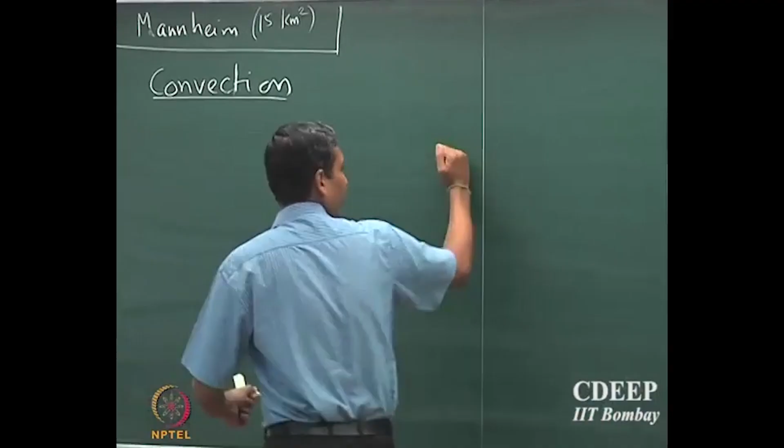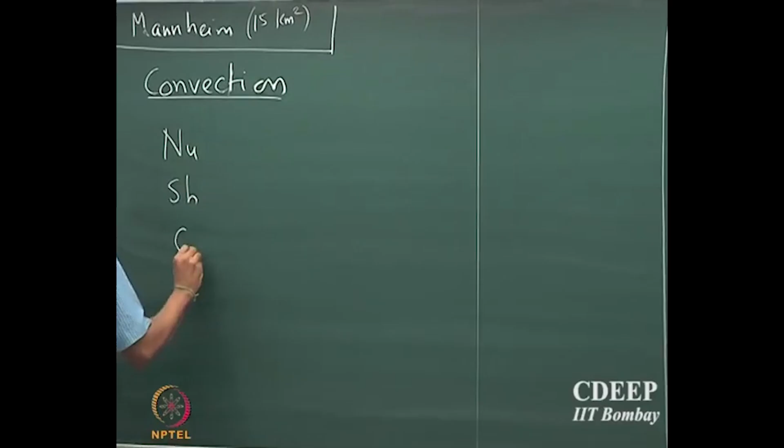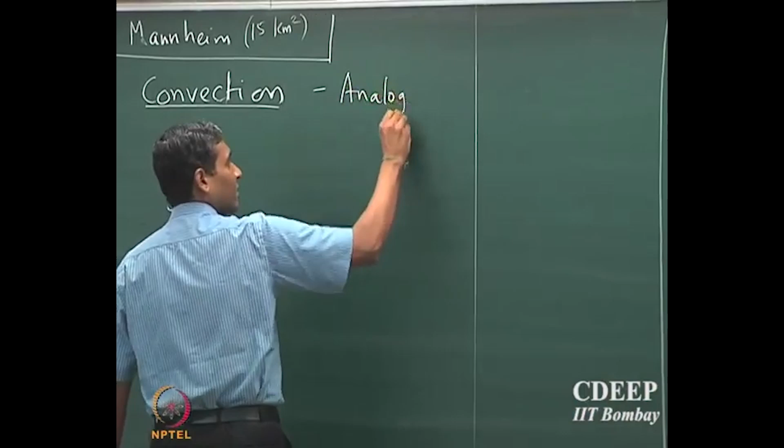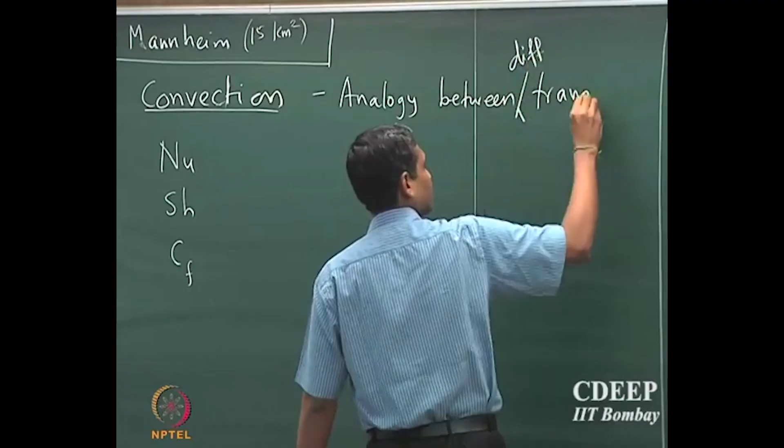Okay, so we've been discussing convection, so let's catch up a little bit and then proceed further. We stopped by observing some of these dimensionless quantities. We've been discussing the analogy between different transport processes. So we said that we define the Nusselt number.

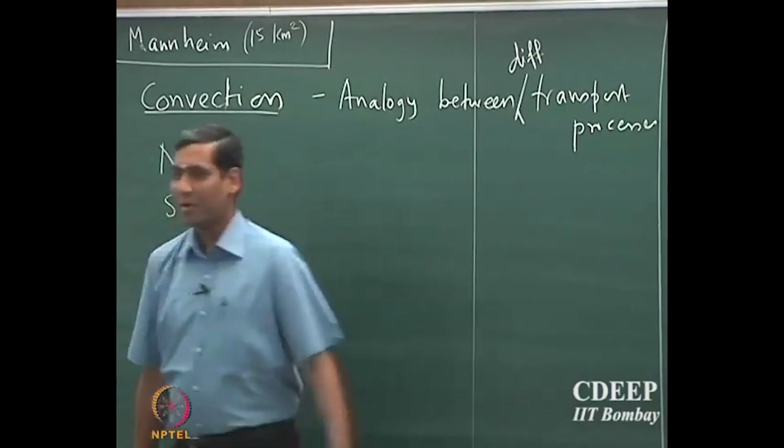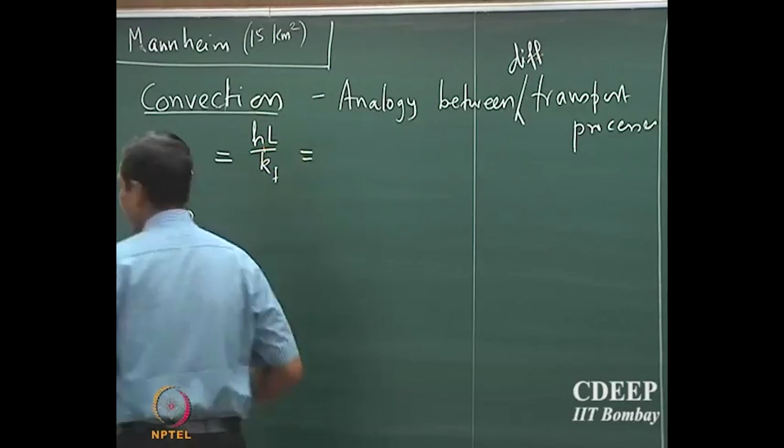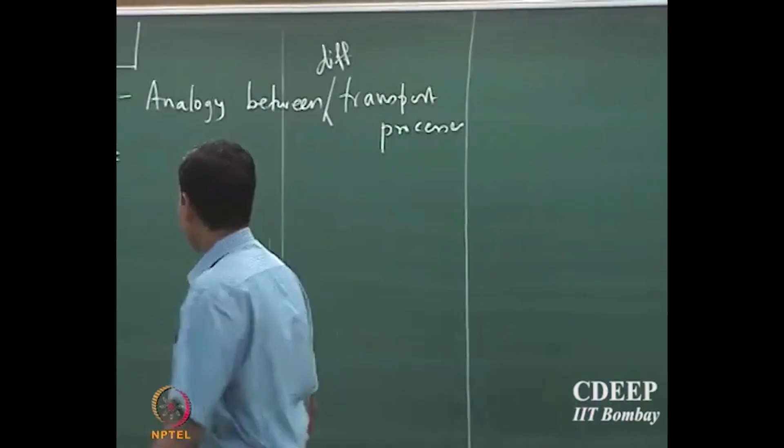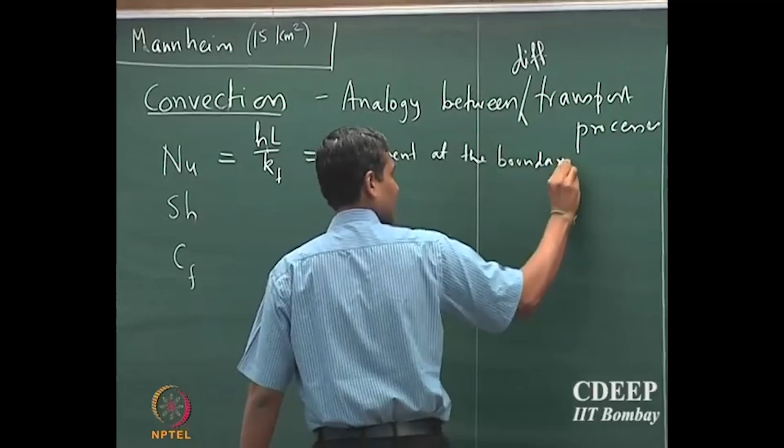Does anyone remember? hL by k. No, it's not minus, it's a positive quantity. What is it? It's the gradient at the boundary. I should rather say interface. It reflects the gradient at the interface.

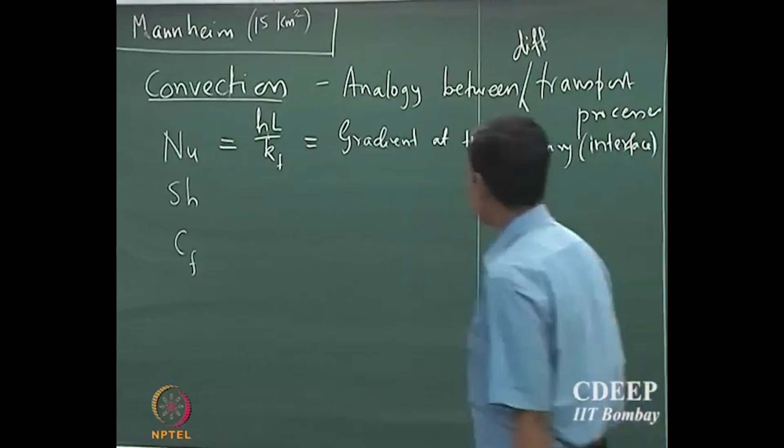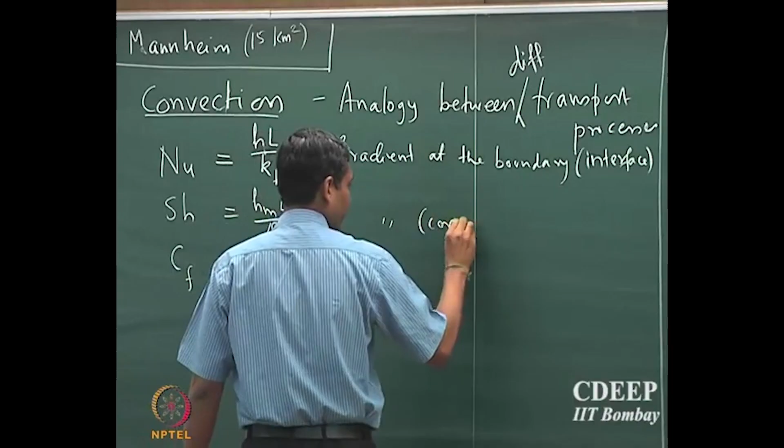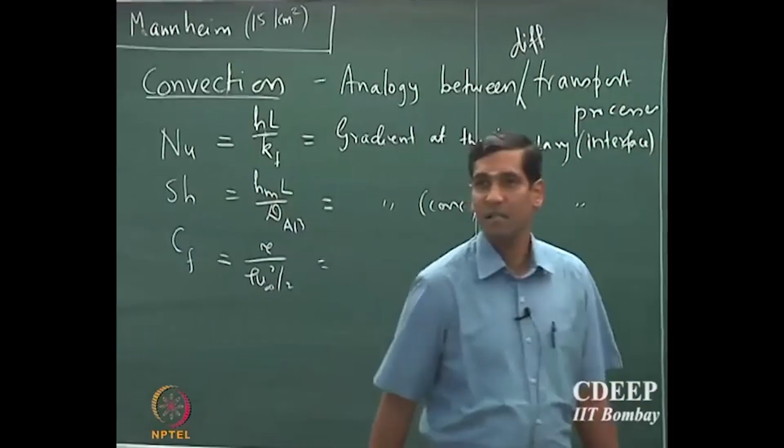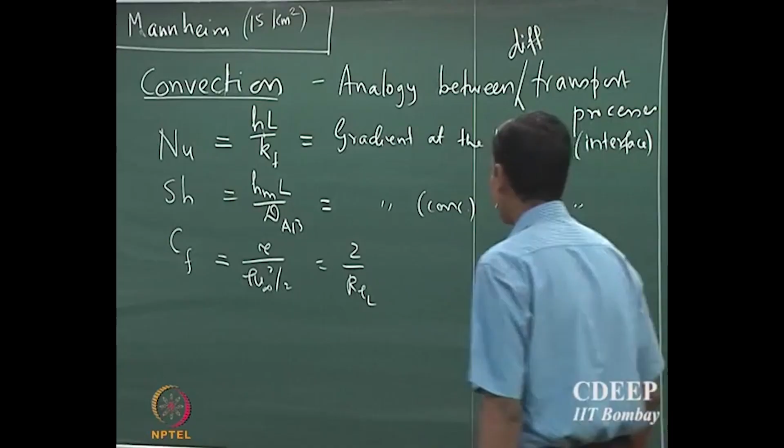Okay, and similarly we could write that, and that's the concentration gradient at the interface. What about Cf? It's tau by rho u square by 2, and that will be 2 by Reynolds number multiplied by the velocity gradient at the interface. Okay.

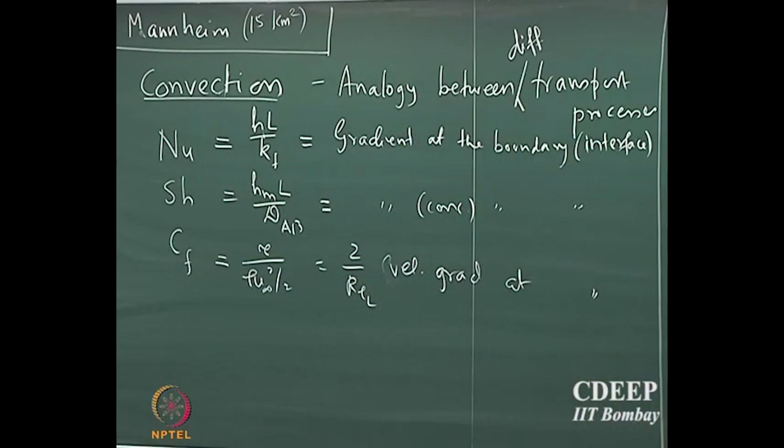But we also defined the Nusselt number as a ratio of the conduction resistance in the fluid divided by the resistance to convection, or rather across the interface, because you are really looking at transport across the interface. And similarly, one could have a definition for the Sherwood number. We will not get into that, it is anyway similar.

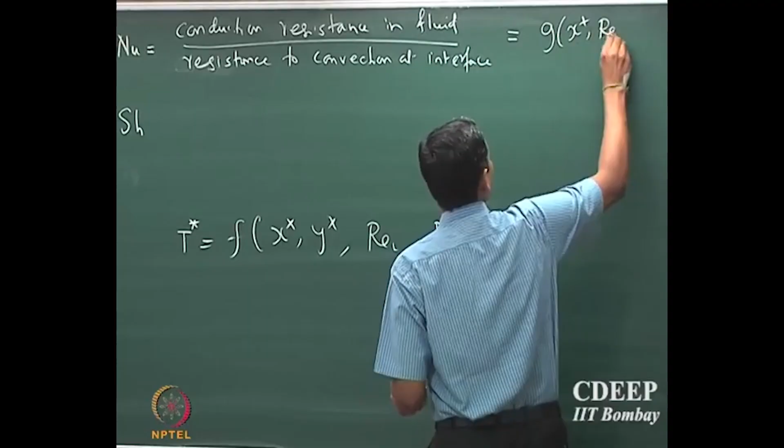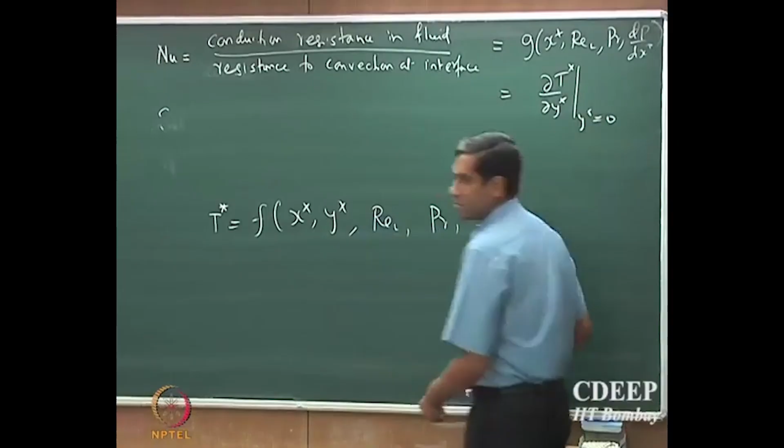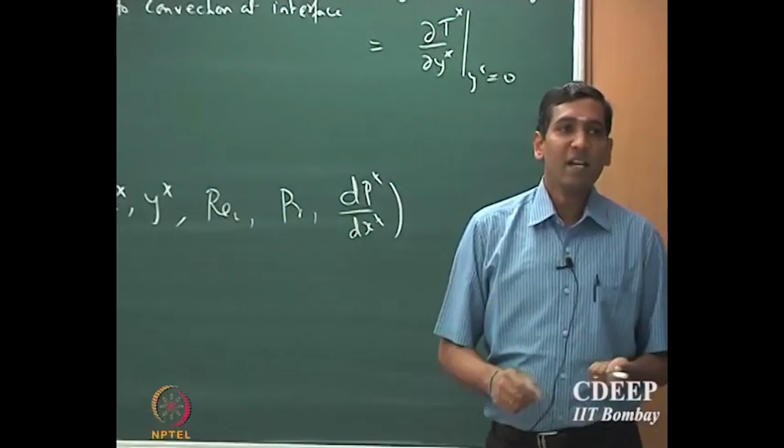Now, we also said, what is the functional form of the Nusselt number? Remember we said that the dimensionless temperature T star is a function of x star, the position inside the boundary layer, Reynolds number, Prandtl number, and if you know the pressure gradient, it is typically a constant. So the Nusselt number will be a function of x star, Reynolds number, Prandtl number, and dP star by dx star. Because it is evaluated at the boundary, you take the first derivative, dT star by dy star at y star equal to 0. So the Nusselt number is not a function of y position anymore, it is only a function of x position, because you are interested in the gradient at the interface, which is y star equal to 0.

Okay, so what we are going to see today is, so far we have not solved any equations. The question is, can we get any further insights without solving the equations? We have to solve them eventually, but let us first try to extract as much information as possible before solving the governing equations.

Okay. So the first observation is that the Prandtl number is a ratio of nu over alpha, which is the momentum diffusivity divided by thermal diffusivity. Now, note that all of these are happening in the boundary layer. So you are looking at characterizing the process in the boundary layer.

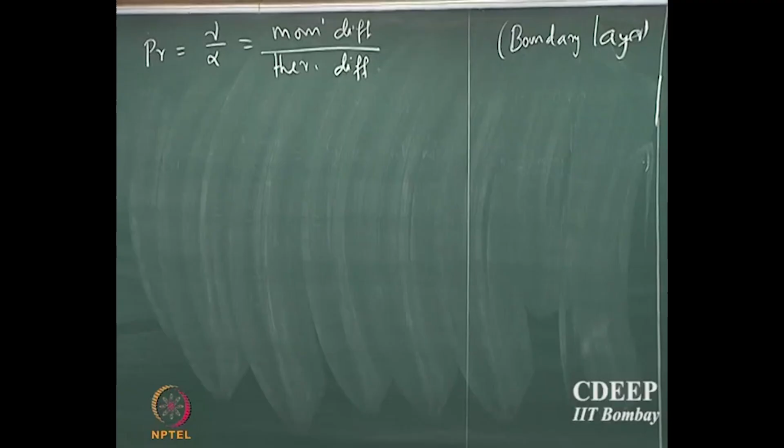So the momentum diffusion and the thermal diffusion have to somehow be related to the delta and delta temperature. What is delta? Delta is the boundary layer thickness. So the momentum diffusion is occurring in the boundary layer, and it has to be a function of the boundary layer thickness, and the thermal diffusivity has to be a function of the thermal boundary layer thickness, because that is the domain in which these two processes are occurring. So, therefore, this is the general functional form. Okay.

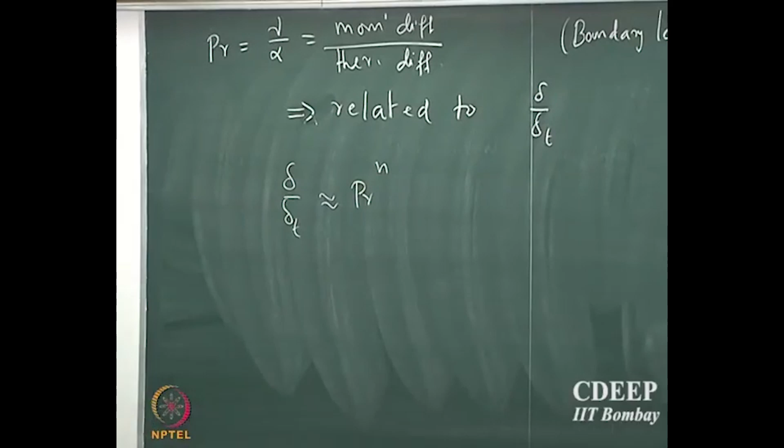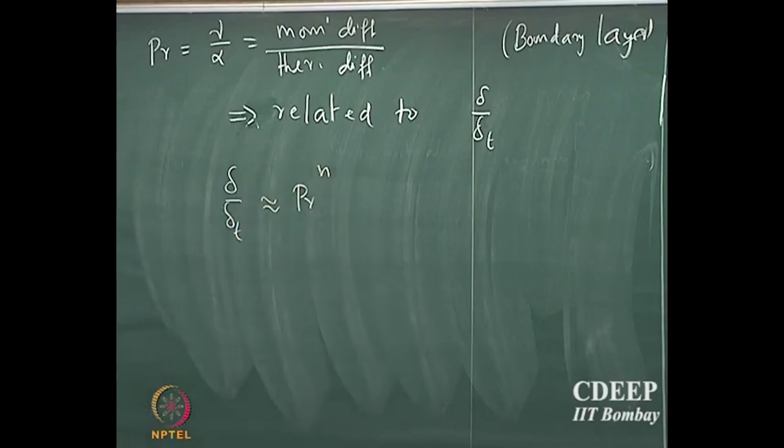We do not know what that n is till now, we are going to figure that out while we discuss different aspects of convection. So, it is safe to assume that the ratio of the momentum boundary layer to the thermal boundary layer thickness scales as Prandtl number to the power of n. Okay, we still do not know what that n is. In fact, some of you who have already done this laminar and turbulent flow experiment in the lab, you must have seen some exponent like this, and so we are going to see what that exponent is. Similarly, one could express delta by delta C as Schmidt number to the power of n.

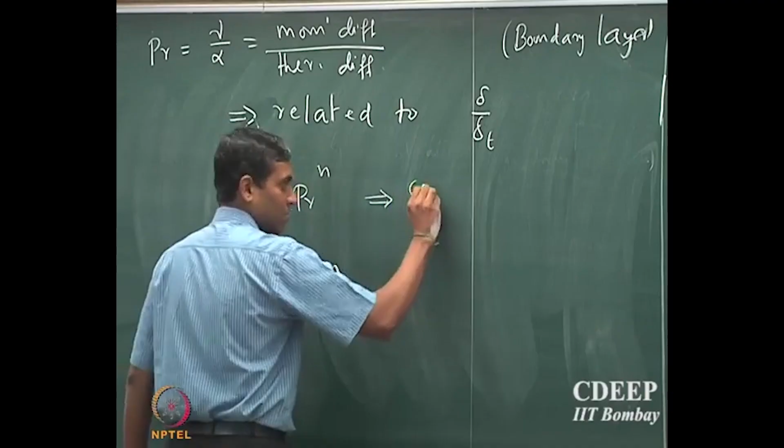So, this also provides a method to compare the boundary layer thicknesses, and same here. So, immediately I could take a ratio of these two. I can say Prandtl number to the power of n, Schmidt number to the power of n. So, that goes as delta C by delta T.

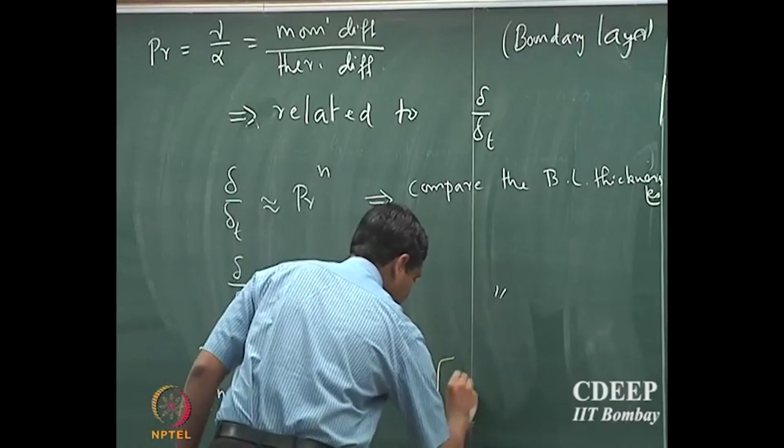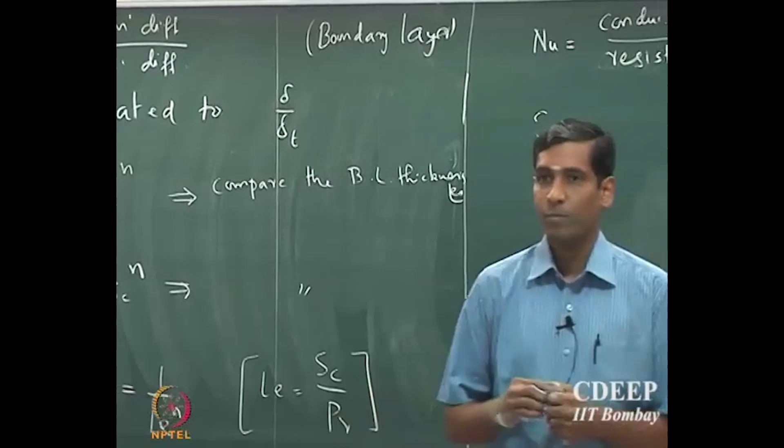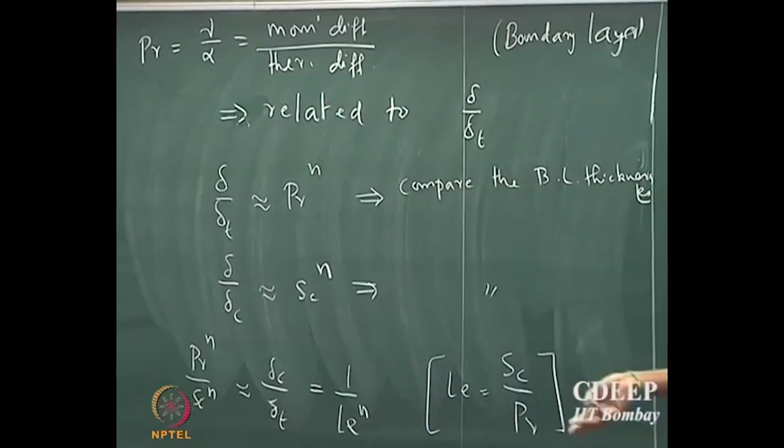Let me make sure I get the numbers right. That is called Lewis number. So, Lewis number is defined as Schmidt divided by Prandtl number. So, if we define a new number called Lewis number, what would be the definition for Lewis number? Remember Prandtl is momentum by thermal diffusivity, Schmidt number is momentum by mass diffusivity. So, Lewis number will be thermal by mass diffusivity, okay.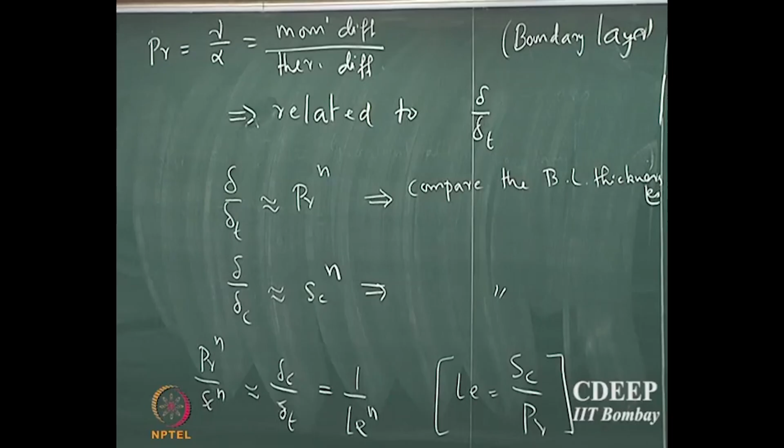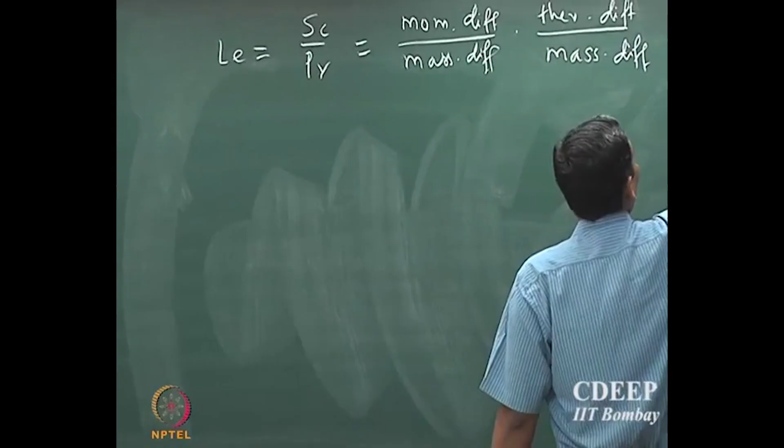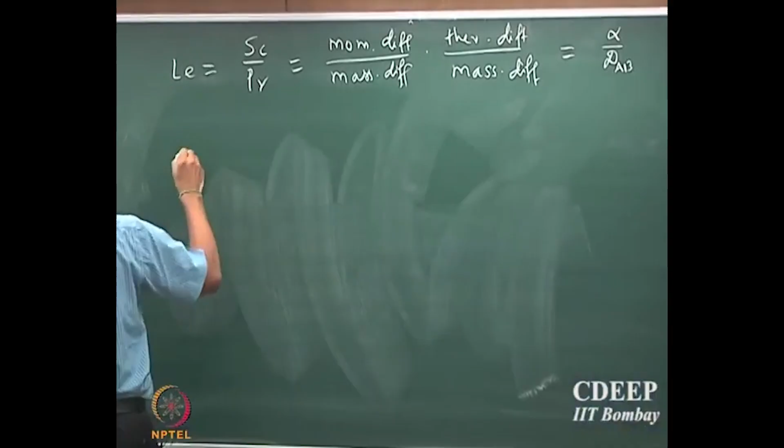So, Lewis number is given by momentum diffusivity divided by mass diffusivity multiplied by thermal diffusivity divided by momentum diffusivity, and so that will be alpha by DAB, where alpha is the thermal diffusivity of the fluid that you are considering, and DAB is the equimolar mass diffusivity of the species that is diffusing in that particular stream. So, really what we have found is that Lewis number, Prandtl number, Schmidt number and Reynolds number, based on the length of the plate, because we have looked at flat plate, you could always consider other geometries. These 4 numbers essentially characterize the diffusive properties of all 3 different transport mechanisms.

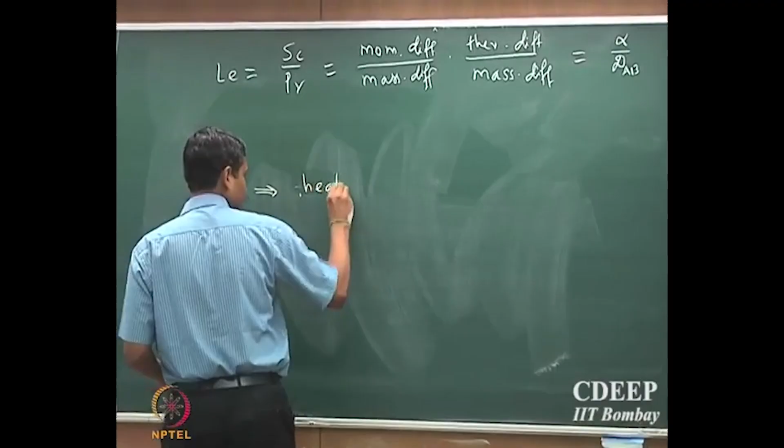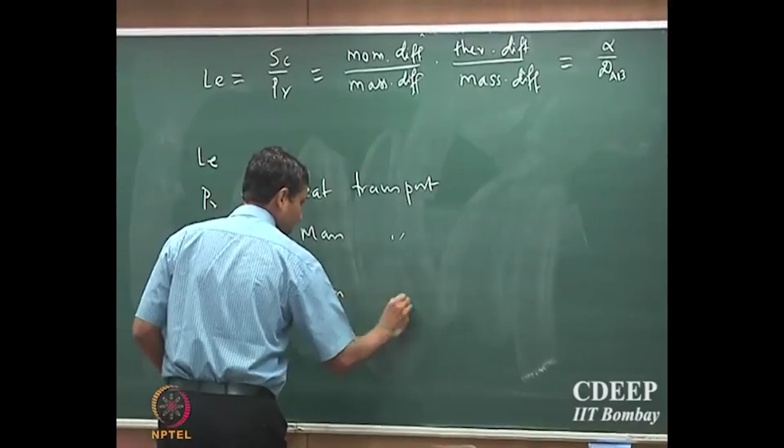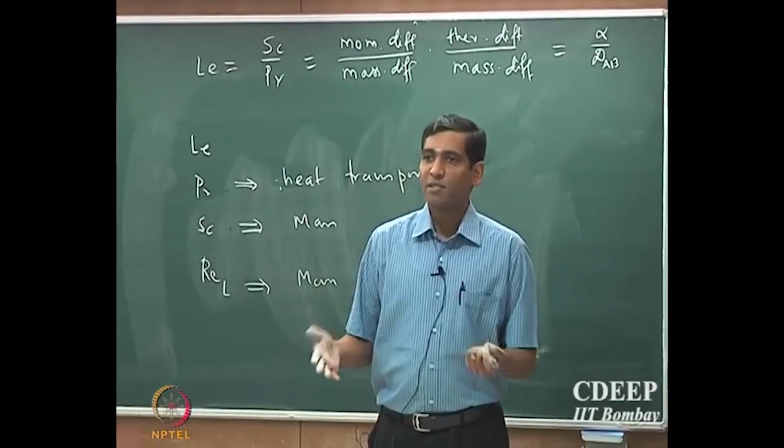So, you get a way by which you can compare all of these, which means that if you know one of them, if you know Reynolds number, there has to be some relationship between the heat transport and the mass transport processes. Each of these numbers, Prandtl, Schmidt and Reynolds number, independently characterize each of the transport processes. So, this characterizes the thermal transport or the heat transport processes. This characterizes the mass transport process, and this characterizes the momentum transport process. Now, you may also recall that the governing equations that we wrote for these 3 transport processes, if we introduce the boundary layer approximation, they all look similar, right. They all have same terms, they have a convection term, they have a diffusion term, plus the momentum boundary layer equation has a constant, which is the pressure gradient.

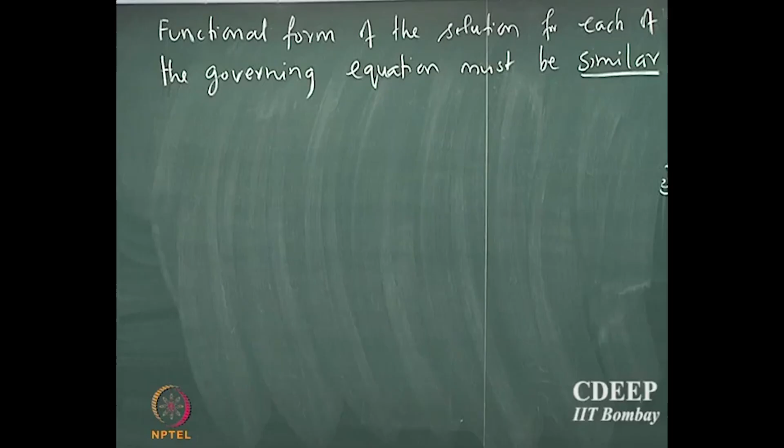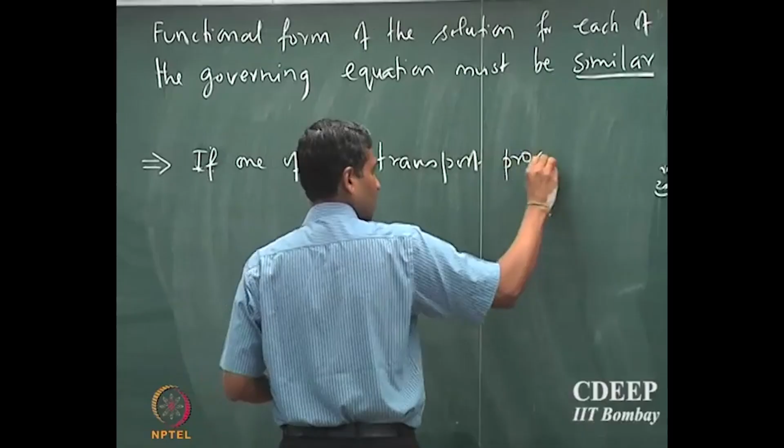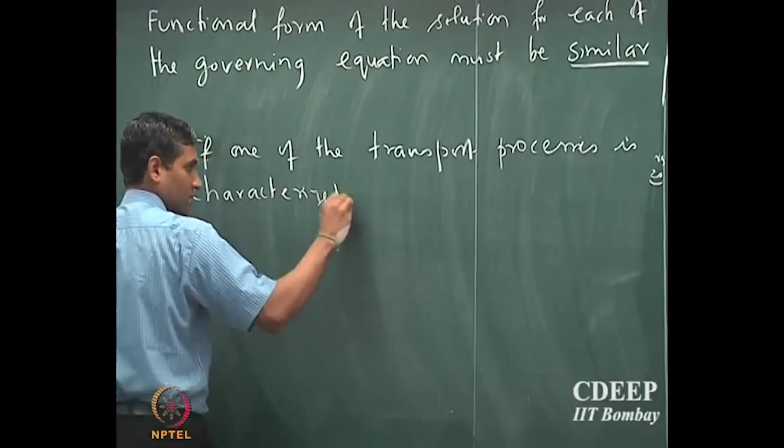So, the functional form of the solution must be similar. Okay. So, it is very important to understand this, it is not same, it is similar, okay, because the momentum boundary layer equation does not depend upon the concentration and temperature, while the concentration and thermal boundary layer equations depend upon the velocity, although their functional form is same. So, therefore, the functional form of the solution that you get has to be similar to each other, which also implies that if one of the processes is characterized, then the other 2 must be similar,

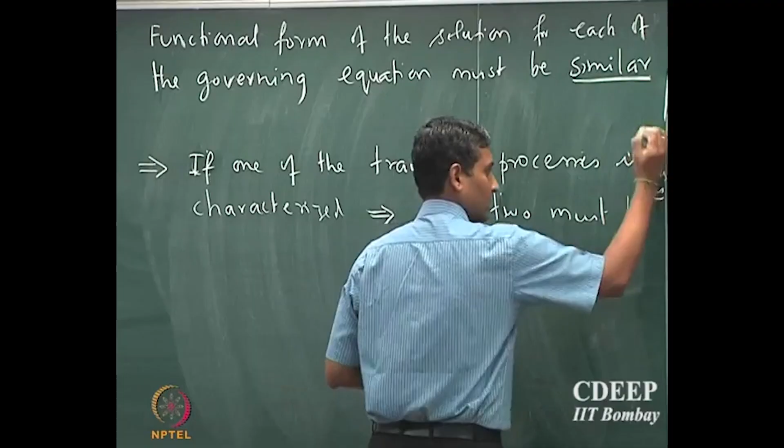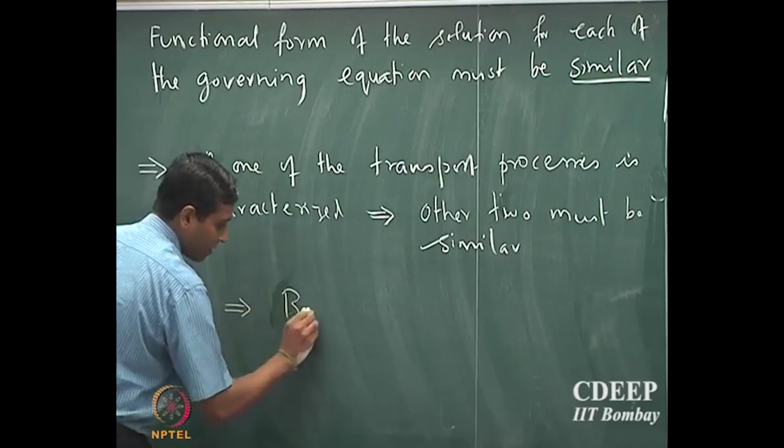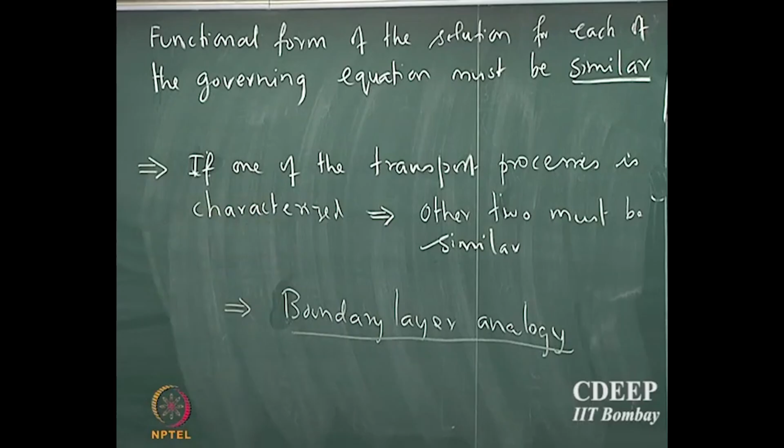okay. So, that also means that because the functional form is same, if one of the transport processes is characterized, if I know how to solve one of them and I found the functional form and I found these dimensionless numbers, then I'm done. I should be able to find the solutions for the other two. Okay. So it is this property which leads to the concept of the boundary layer analogy. So we are going to capitalize on this observation that the functional form is similar, and we are going to identify how to relate these three transport processes, and therefore by characterizing one of them we should be able to characterize the remaining.

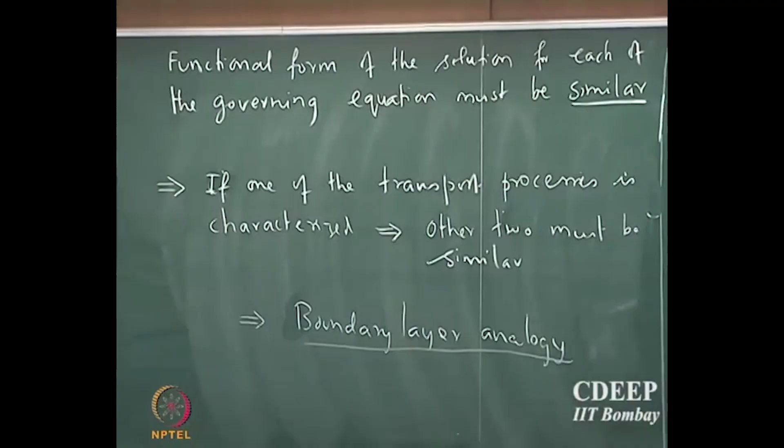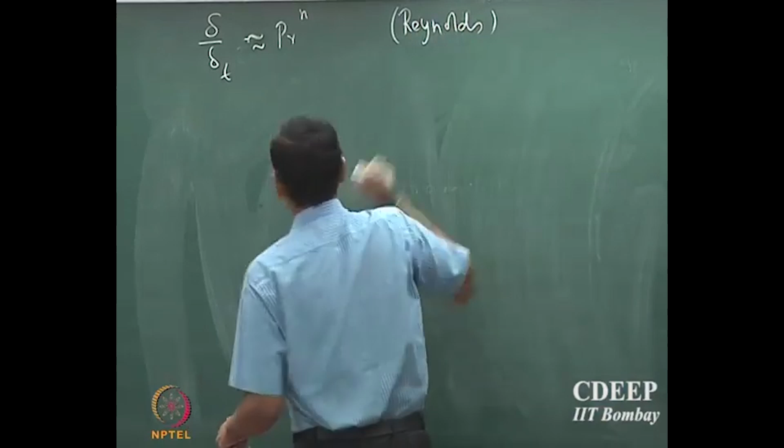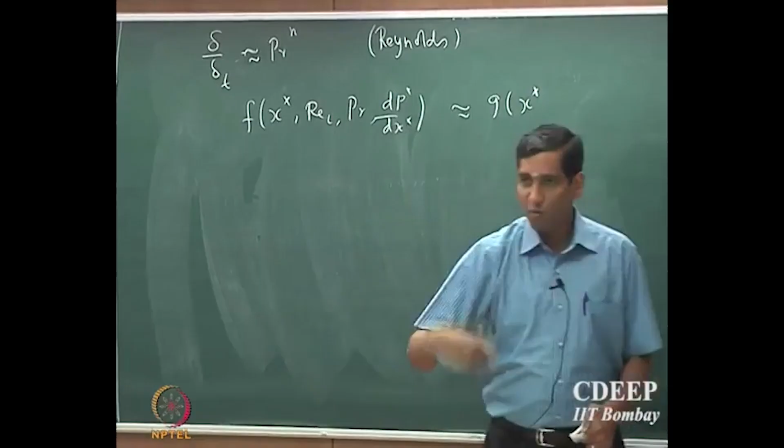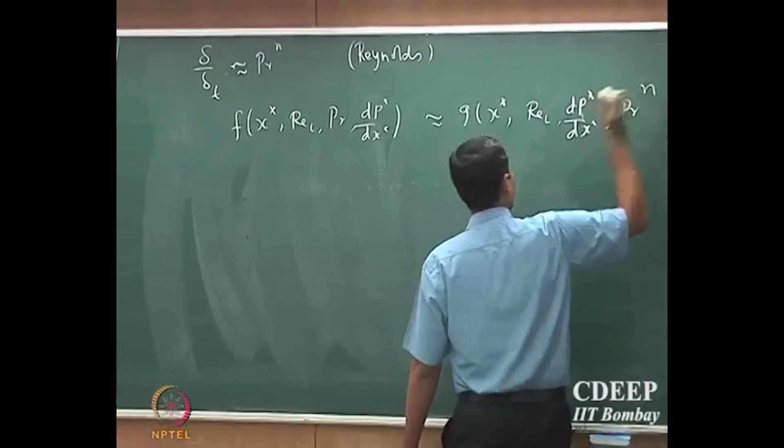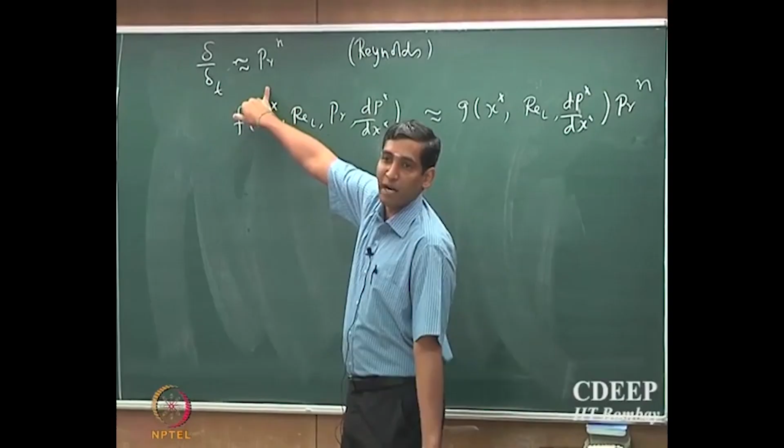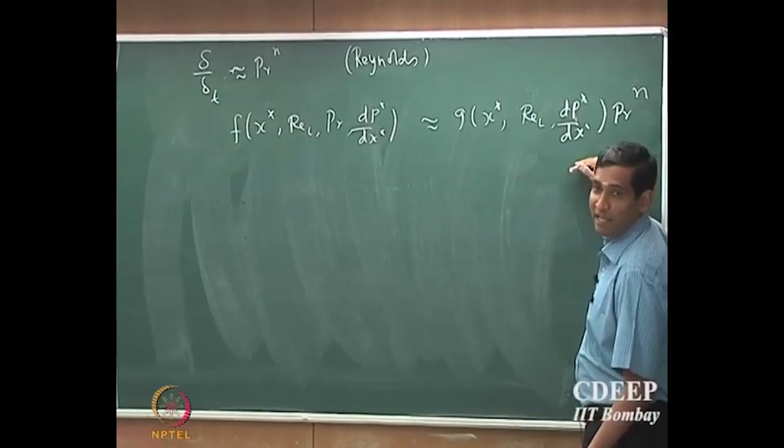Prandtl number to the power of n. So it scales as some function multiplied by Prandtl number to the power of n, and in fact that observation is because of the positing that the ratio of boundary layer thicknesses scales as the Prandtl number to the power of n. This may appear very heuristic right now, but you will see in the subsequent lectures that in almost all the geometries and all the problems you consider, this is the kind of scaling you would usually get. So for now we will assume that this is the scaling that you will get.

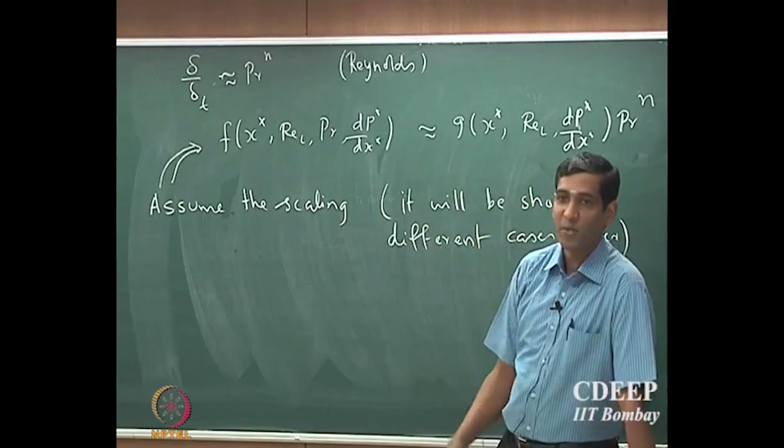Assume this scaling. In fact, for different cases later. By the way, this has been experimentally shown very well. There are some nice experiments that have been performed where you can see this kind of scaling has been observed experimentally for different kinds of problems.

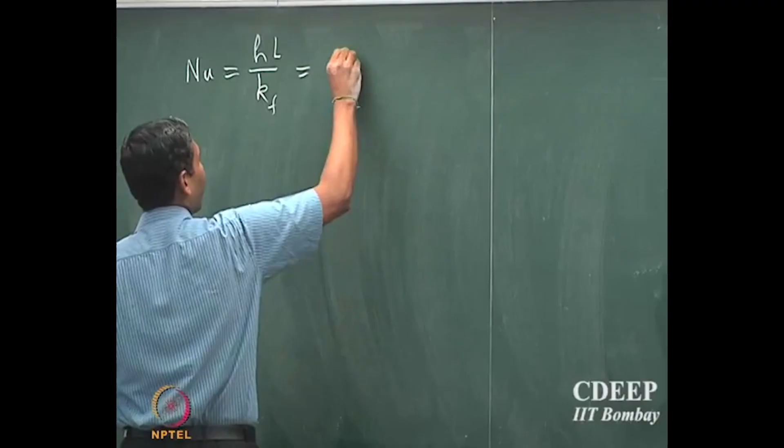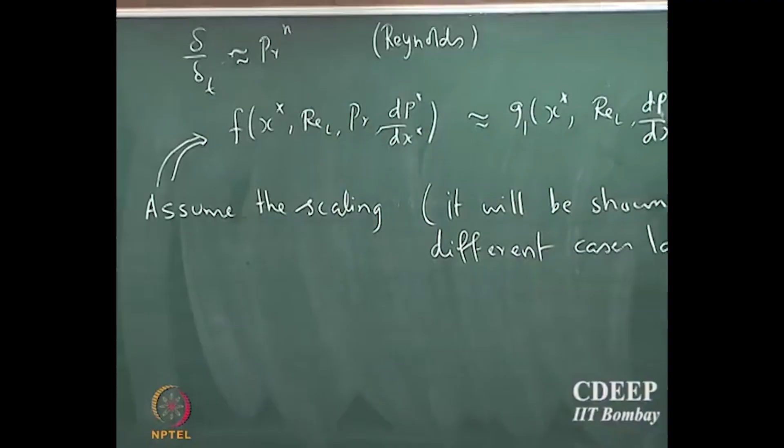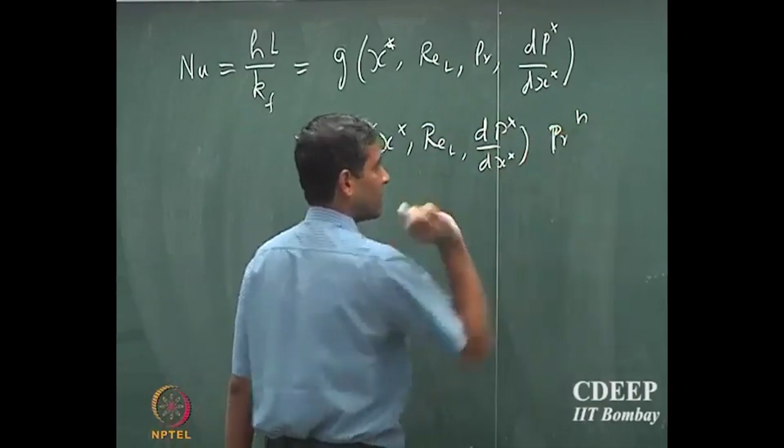So similarly, you could assume, therefore we said that the Nusselt number, which is hL by kf, is given by some functional form. Let me use a different nomenclature and call it G, a function of x star, REL and Prandtl number. It turns out that it scales as dp star by dx star into Prandtl number to the power of n. That is because of the observation that the Prandtl number to the power of n scales out as a separate entity in the functional form. We should be able to write the Nusselt number simply as some function G1 of x star, the x position, the Reynolds number and some pressure gradient, multiplied by Prandtl number to the power of n.

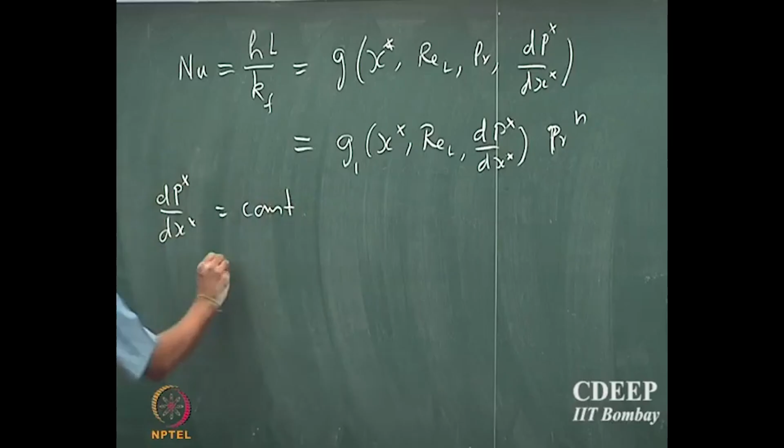Supposing I assume that dp star by dx star is constant, which is a fair thing to say, the Nusselt number can simply be written as G1 of x star, REL, into Prandtl number to the power of n. Similarly, the Sherwood number will have the same functional form of x star multiplied by Schmidt number to the power of n. Any questions? Because the heat transport and mass transport in the boundary layer are related to each other.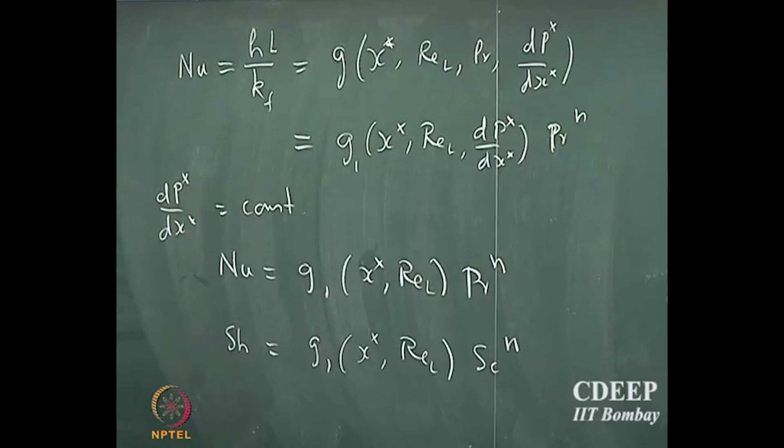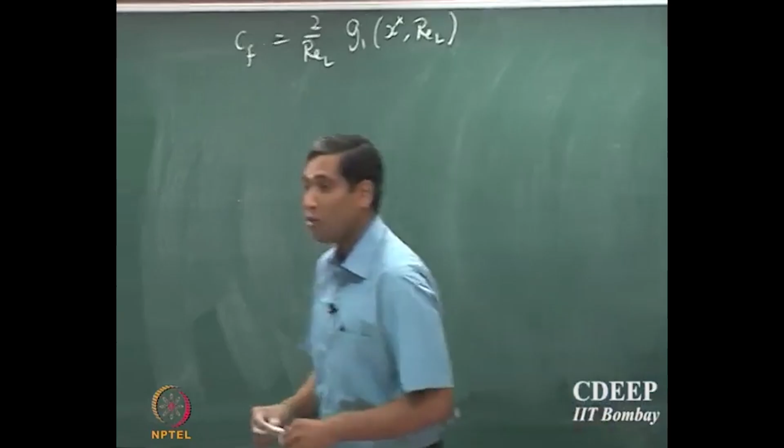For the momentum boundary layer, we said that the friction coefficient is given by 2 by Reynolds number into the same functional form, G1 of x star, REL. Now, if I am going to relate these three, how do I know that this functional form would be just G1? The reason is that if you remember the model equations, the scaling in front of the diffusion term in the momentum equation is 1 by REL, in the heat transport equation is 1 by REL into 1 by Prandtl number, and in the mass transport equation is 1 by REL into 1 by Schmidt number. That is why the functional form will be the same.

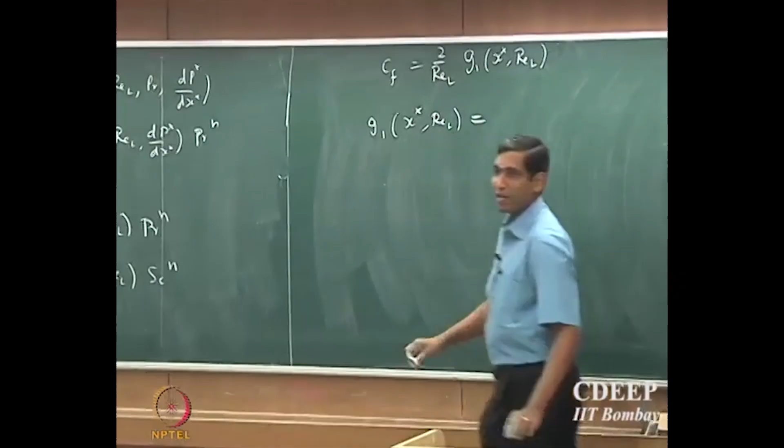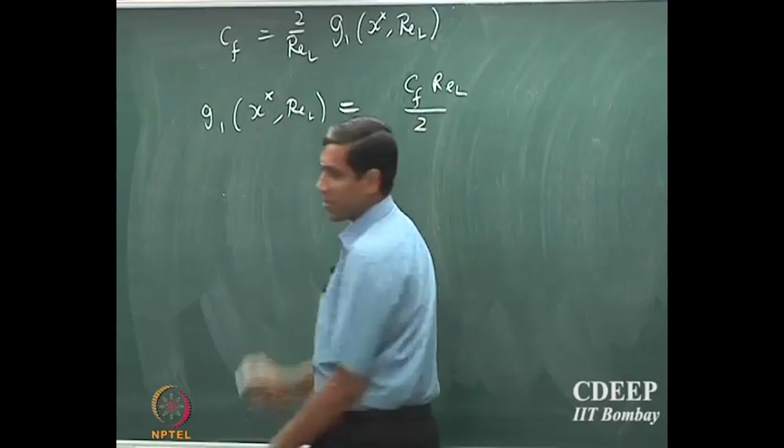So now we can relate these functional forms. We said G1 of x star, REL should be equal to CF REL by 2. And suppose the Prandtl number and Schmidt number are 1. When can Prandtl number and Schmidt number be 1? When can that be? When can you have delta T and delta the same?

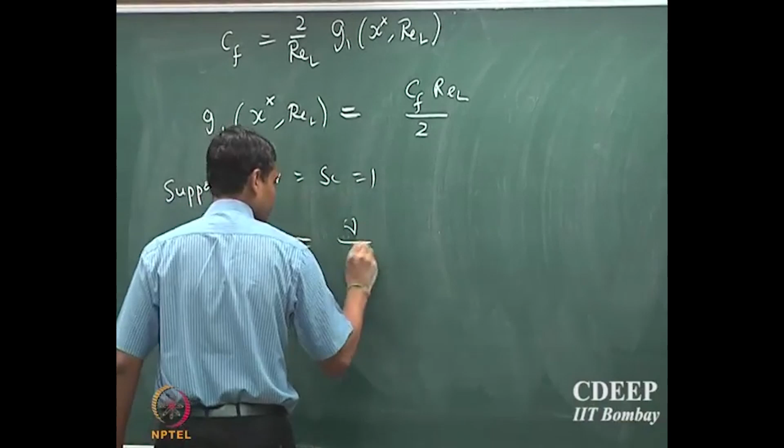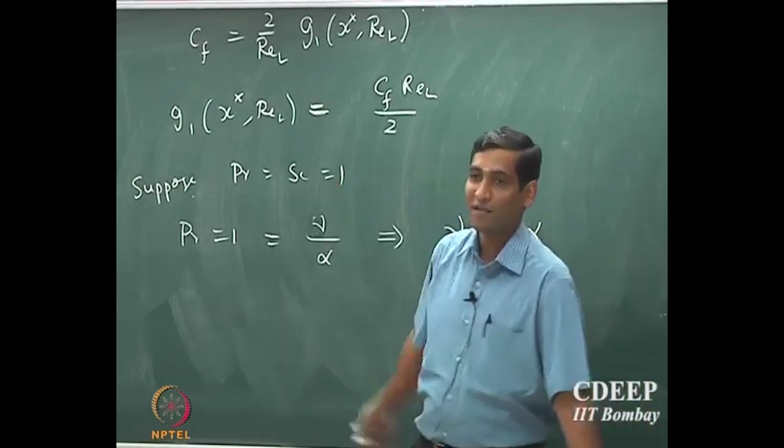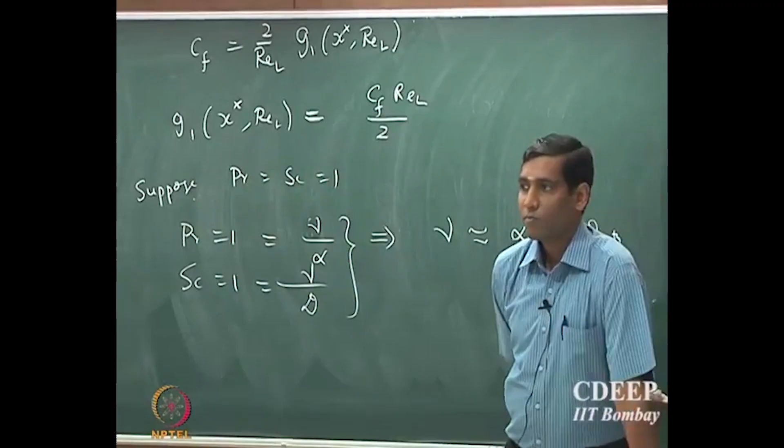When Prandtl number is equal to 1, remember that it is nu by alpha, momentum diffusivity by thermal diffusivity. So this is 1, which means that the momentum diffusivity is almost equal to thermal diffusivity. When is that the case? What kind of systems will have momentum diffusivity and thermal diffusivity equal, or let us say momentum diffusivity, thermal diffusivity and mass diffusivity? I said Schmidt number also is equal to 1, which is nu by D. Does anyone know an example of when the thermal diffusivity and mass diffusivity are almost equal?

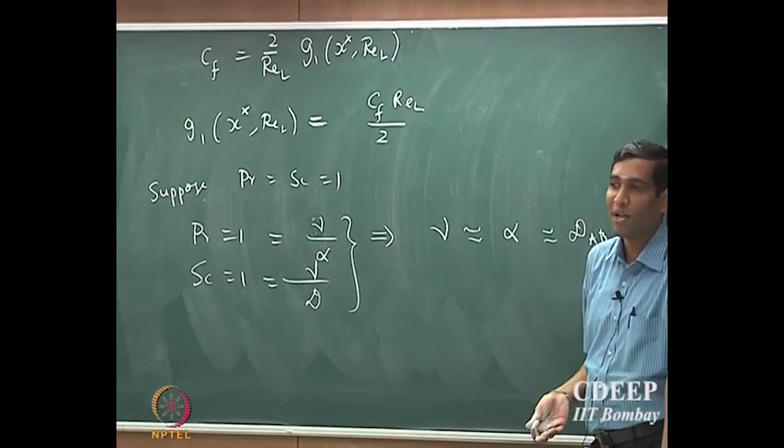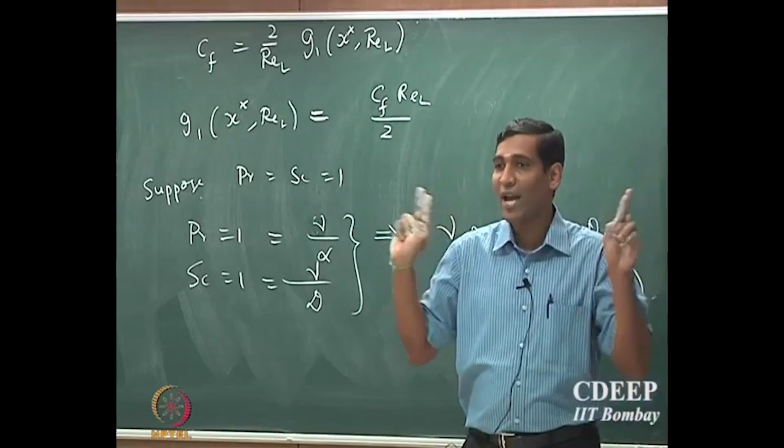It is dilute gases. When you have a very thin gas stream and you measure its properties, it turns out that these three diffusivities are almost equal. They are not exactly the same, but they are almost equal. So in those cases, the Schmidt number and Prandtl number are almost equal to 1.